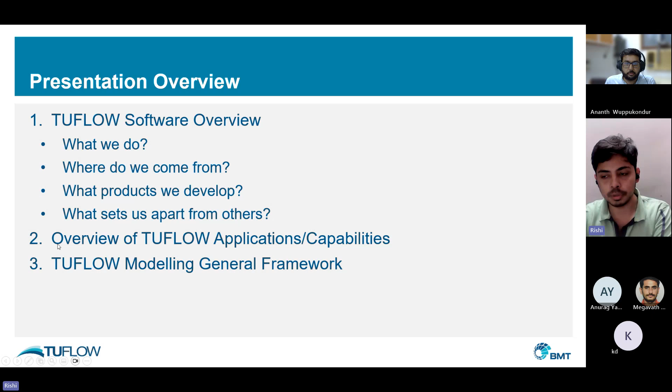So what is TUFLOW? TUFLOW is something that develops, markets, and sells state-of-the-art 1D, 2D, and 3D numerical engines, and its supporting tools, for simulating free surface water flow. TUFLOW is used by over 700 companies globally.

This image is a pretty old one, about 6 to 7 years back. At that time there were only two universities, shown in pink, who used TUFLOW for research - only IIT Delhi and IIT Chennai, back in 2017. But currently, most of the major IITs have started to use TUFLOW along with some NITs, and central government organizations have started using TUFLOW for small scale flood studies up to very large scale river studies like the Krishna and Ganga rivers.

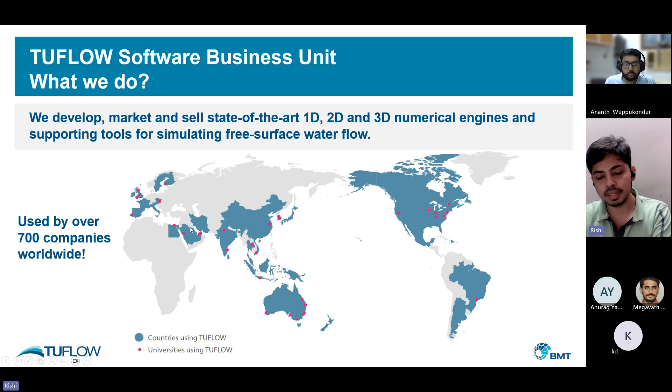It originated from Australia, from Brisbane, at a company called BMT Consultants, and then it moved to a lot of companies in UK and US, and across the globe, with other countries primarily using it for flood studies.

I won't go into much detail about TUFLOW's heritage, but one thing I can say is it's a very old software, started back in 1972 when TUFLOW was introduced as a 1D solver called ESTRY. ESTRY is the 1D component of TUFLOW. The name came because it was initially used for modeling estuarine environments, but the name has stuck from then, and even today the 1D component of TUFLOW is called ESTRY.

This is when, in 1989 to 1990, the 2D solver of TUFLOW was developed, and from 1990 onwards the 2D solver was very prominently used across Australia. It's a very capable 2D solver with a huge number of flexibilities, and many companies who use TUFLOW for 2D have solvers within graphic interfaces that use TUFLOW's 2D engine.

2001 was the first time TUFLOW's sale was done commercially. Initially, TUFLOW was not created for commercial sale purposes - it was generally to support the internal business for BMT Consultants. But when people saw us using TUFLOW, the first request came from the UK office, and that is when the first commercial sale of TUFLOW was done.

Between 2002 and 2006, with the flexibility of TUFLOW, a variety of third-party graphic interface providers used TUFLOW's engine built into their own products with their own interface names. For example, SMS has TUFLOW as one of its components. Flood Modeller also has TUFLOW integrated. XP Solutions' XP SWMM, which historically was independent but is now part of Autodesk, used TUFLOW as its 2D engine, and this is more popular in Australia.

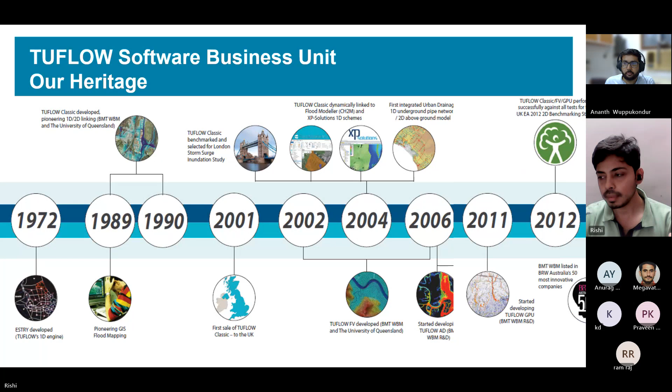In 2016, TUFLOW also got FEMA approval. In 2012, TUFLOW was benchmarked against various environmental agencies, including tests from the UK, to benchmark its speed and accuracy. This was one of the major milestones in establishing TUFLOW as the best in terms of speed and accurate solving.

The first probabilistic Monte Carlo assessment framework was done with TUFLOW in 2015, for a Brisbane flood study which won a lot of awards at that time.

In 2017, TUFLOW's HPC solver, or the GPU component, was first released. This enabled all the new developments in flow modeling, such as large-scale flood modeling applications, which was only possible because of this GPU integration. Before this, models were much smaller scale and more constrained. But now with GPU solvers, it's much more reliable, and real-time scale modeling became possible.

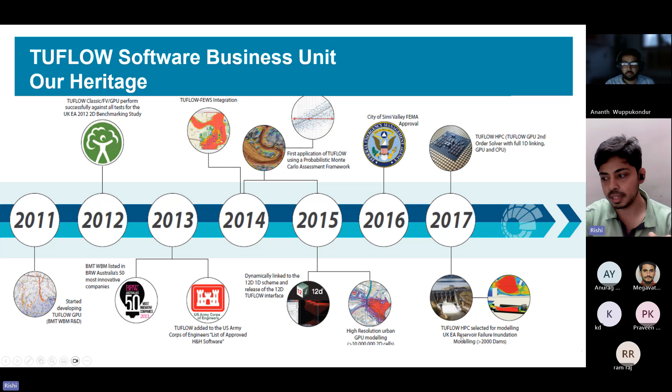TUFLOW is very well known for dam breach inundation modeling. I was part of a large-scale project in the UK when I was working with a major consulting group, where we modeled all 2,000 major reservoirs of the UK using TUFLOW. TUFLOW was specifically selected for its speed and accurate solver mechanism. This TUFLOW HPC scheme was selected for modeling UK reservoirs for breach inundation modeling, and this was the dam breach inundation model I worked with.

What are the benefits of having TUFLOW knowledge in the Indian scenario? Apart from having a very good, robust solver that's quick and flexible in model setup, there are many MNC companies that use TUFLOW in India. For myself, after my master's from IIT Guwahati, I was looking to get into one of these companies to start my water modeling career, and that's when I joined Mott MacDonald as my first company.

There's currently huge demand for TUFLOW modelers with some mid-level experience. Companies are hiring for various projects in the UK, Australia, US, and Europe, so there's a big requirement for TUFLOW modelers. For students and researchers too, having common working knowledge of TUFLOW gives you multiple opportunities, making it easier to work abroad or collaborate with clients and researchers.

I'll show you why TUFLOW is special in terms of flexibility of model build. There are three primary products. One is ESTRY, a 1D open channel flow for pipe networks, which also supports 1D structures like bridges and culverts. Then there's TUFLOW Classic or HPC, the fixed grid-based solver using square cells, which has two components: GPU hardware and advection dispersion.

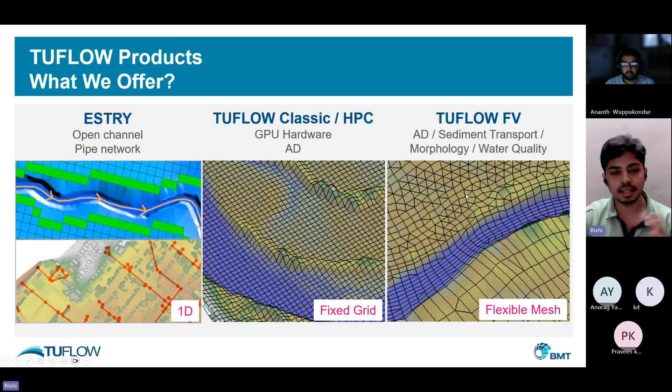One thing to note is that if you take TUFLOW Classic or HPC, ESTRY comes for free—it's already built in and not sold separately. So essentially there are two solvers: TUFLOW Classic or HPC, and TUFLOW FV, which is for coastal and sediment transport modeling. These are the three products we have.

So what sets TUFLOW apart from others? One thing is that the entire TUFLOW team are themselves users and developers of the software.

In the TUFLOW team, it's not like the developers of the software are some computer programmers and the users are from the water resource background. They're one of the kind of company where all the developers are also the users of the software because they use it for the consulting business. So we really know what are the requirements as a user or the consulting works which we do.

And also from the researchers' point of view, we collaborate with a lot of universities to know what are the users' requirements and what new research is being done, and try to develop it within our team. So that is one good aspect. And we are open to any new ideas.

And if you want to really integrate TUFLOW into some of your codes and other things, we are happy to do that with certain libraries as well. And also we listen to our clients and build features which they want. If you see TUFLOW releases, almost every year there's a new release, and these are features which some of our clients have suggested. So those features are being incorporated apart from our own research which we do in the team.

And TUFLOW has been extensively benchmarked for the last 45 years in various university studies, internal studies, and industry assessments. So these are some of the reports which was done using TUFLOW, which was basically benchmarking against various studies. You can go through these reports on the TUFLOW website.

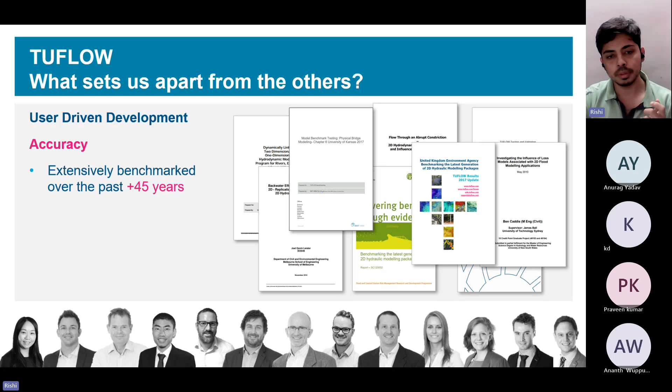And TUFLOW was also done for real world calibration studies. There are virtually many of them, thousands of them. So these are again done using TUFLOW's scheme, and these reports are available on the TUFLOW publication page. So you can go through these reports.

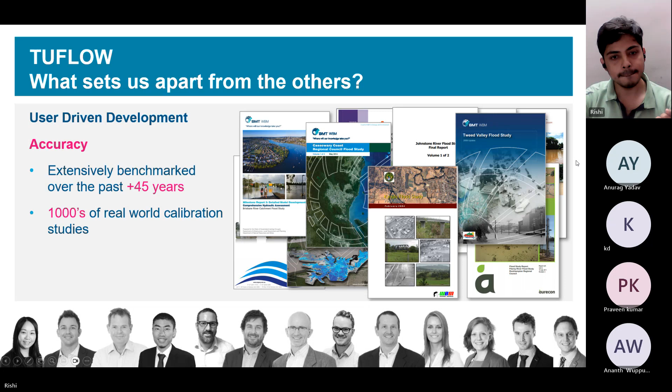So one specific area where TUFLOW really excels, apart from any free source software or much better commercial software, is in terms of speed. Put simply, TUFLOW is the fastest 2D shallow water solver available currently in the market. And again, this is not just out of the air.

This was one of the studies done by the UK's Environment Agency. So this is a report where they have tried to benchmark all the latest generation 2D hydraulic modeling packages for its speed, accuracy, and how flexible it is to get the model set up. I'm just showing one of the test cases called test 7, which is somewhat similar to a real world case. So in this, they have really benchmarked

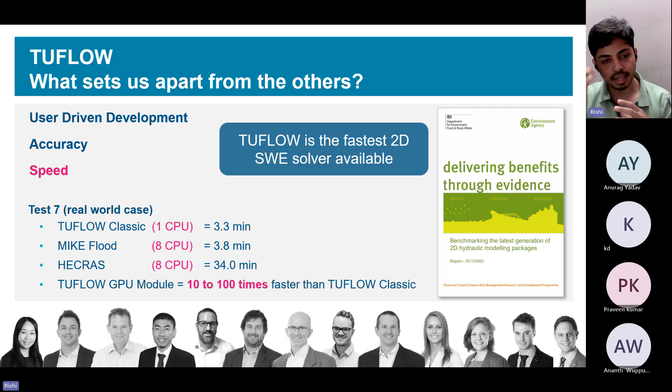an example model with TUFLOW Classic with one CPU. It takes 3.3 minutes, whereas Mike Flood with 8 CPUs takes 3.8 minutes. And HEC-RAS is way slower because of its scheme and its setup. Even with 8 CPUs, if you're running with multi-core, it takes 34 minutes, so it's way much slower. And now with the recent release of the TUFLOW GPU module, it is 10 to 100 times faster than TUFLOW Classic. So you can see that TUFLOW is fast, quite quick in terms of its solution scheme, and it's more efficient. If you see in the actual code how it works, it's very fast and it's easier to set up the TUFLOW model too.

And also, it is exceptionally stable. This is again a tsunami assessment. You can see there are huge water level gradients across a 2D model. So if your solver can predict such huge water level gradients, about 7 meters high of water in a very good environment condition, that is exceptionally stable in 2D. And also, it is very popular for 1D 2D linking schemes.

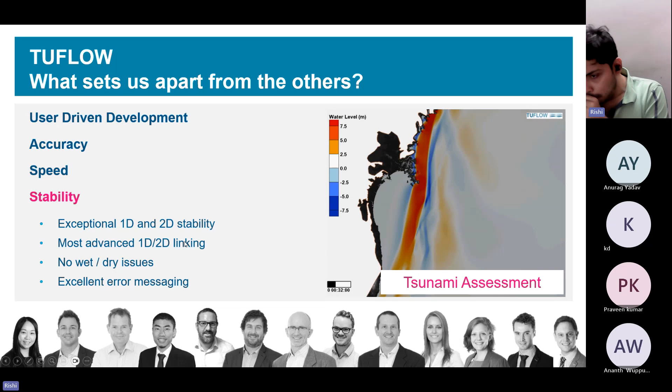TUFLOW is widely popular for 1D 2D linking in flood modeling because the 1D 2D linking is very useful. If you have a surveyed cross section of the channel, you can link it to a 2D area, which is more realistic than just taking the channel from the LiDAR or DTM.

This 1D 2D linking plays a big role in TUFLOW and it's very stable. You don't have any wetting and drying issues at all in your model. Most other software solvers I've experienced, like HEC-RAS or even MIKE, have a lot of wetting and drying issues. If a channel or a cell gets dry, the model can go unstable. But in TUFLOW, even if a cell or channel goes dry, it doesn't matter to the model. It runs the model in a very efficient manner.

There is excellent error messaging capability. TUFLOW is very much linked with GIS, QGIS shapefiles, or even geopackage files. If there's any error, warning, or check file, it gives you a proper check file which you can load in QGIS to see what the issue is. There's also an error code, and with that code you can go to TUFLOW's website to see the possible resolution and do an interactive check yourself. So it's not very much of a black box. The code itself isn't very open, but there are quite good diagnostic checks in TUFLOW which really help modelers move away from that black box kind of mentality.

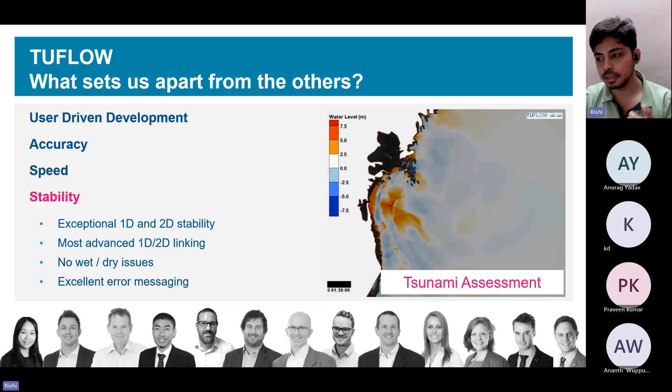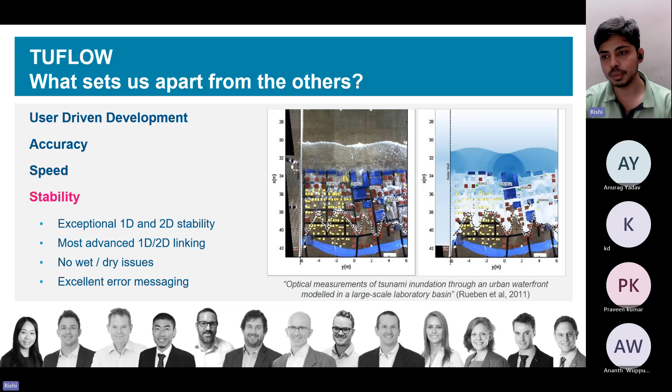This is the extent of tsunami inundation done for a lab flow experiment, where we tried to study the flood extent due to a tsunami. This is the flood extent in a coastal town, and this is the model extent. The black dot shows the observed extent, and it matches very well with the modeled extent, so we can say it is quite well validated.

What I also really like about TUFLOW is the model build flexibility. Currently most people use QGIS because it's a free source environment. Though TUFLOW doesn't have a specific graphic interface, there's a plugin within QGIS you can use as a graphic interface, apart from getting the benefit of QGIS's powerful GIS functionality. So you're getting two things at once.

There's also MapInfo or ArcGIS if you want to use that environment instead. You can build in any of these layers, and you don't have to have a license to build your model layers. Unlike some software where you need a graphic interface license, you don't need any license for this - you can build your model layers freely. Only when you need to run your model do you need a license.

You can also share your results with anyone - you don't need a license to read the results either. It's all free source outputs like NetCDF, XMDF, and ASCII files, rasters, or even CSV files. It's a very simple input and output format, which is the crux of TUFLOW modeling.

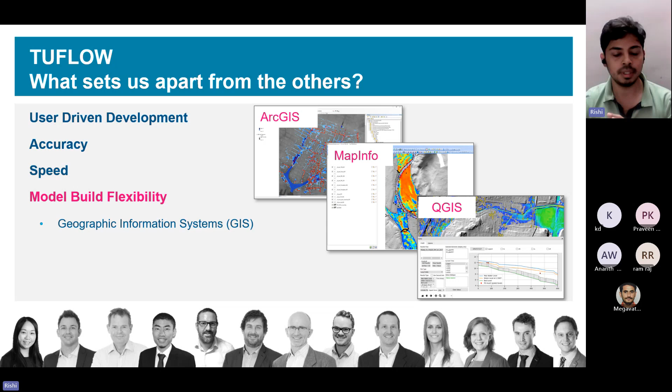As I said initially, there are a variety of third-party graphic interface providers. Flood Modeler has one component for 2D in TUFLOW. 12d is a popular Australian software for drainage models and drainage design. XPSWMM and SMS Aquaveo have the 2D engine built within them for TUFLOW, so you can use those if you want. This is the flexibility of TUFLOW - it's widely simple and easy to integrate with other third-party solvers because of its open-ended nature.

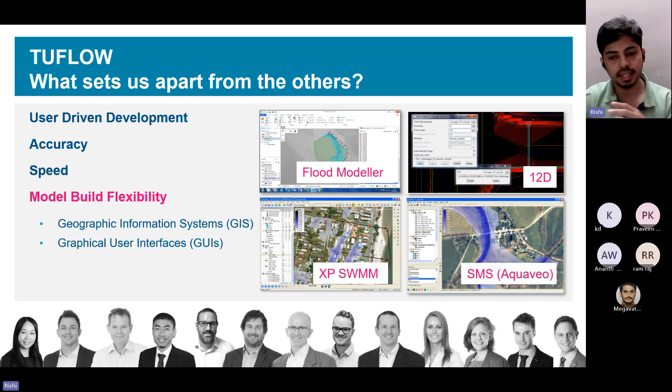There are also a variety of third-party apps. The TUFLOW QGIS plugin is one where the BMT team or TUFLOW developers have built this plugin, so you can use it as a graphic interface itself within QGIS. It has all the features to view the layers and other things. There's also something like Batchy, WaterRIDE, TRIM, and the TUFLOW FEWS adapter, which you can use.

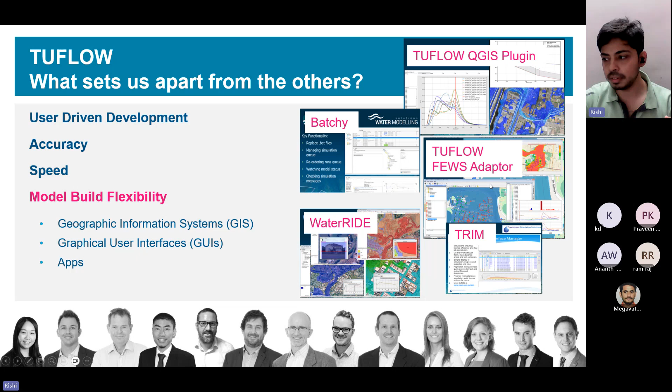TUFLOW also has an excellent support mechanism. If you're having any queries or need support in terms of training, especially in India now since I'm there, I'm training almost every 1 or 2 weeks at one of the institutes or even companies. So if you have any question or need support in your model development, it's a very good thing in TUFLOW support. If not me, even the Australian team, if you email them, they'll be very happy to help you resolve your issue with TUFLOW.

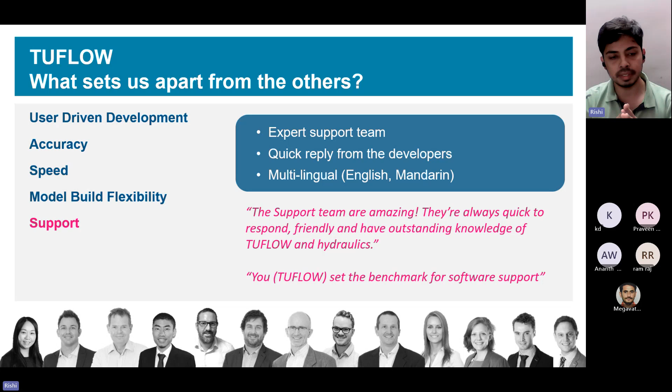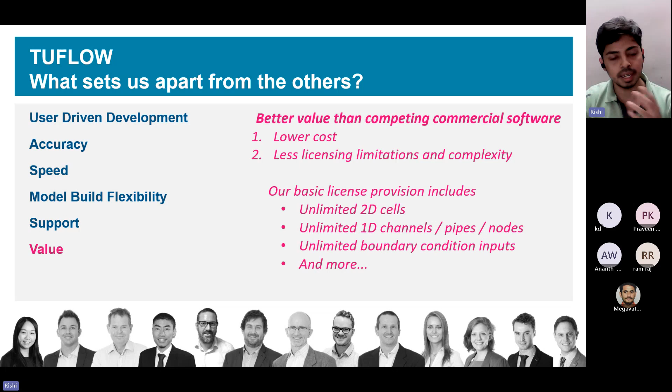Also, the one good thing with TUFLOW is that it's not a free software, but still it is much lower cost, even a fraction of any other commercial competing software. And there's no licensing limitations at all in the model. The number of cells are unlimited 2D cells. You can have unlimited 1D channels, pipes, and nodes, and unlimited boundary condition inputs can also be given. So the value you're getting for the cost paid is really good in TUFLOW.

I'll just show you some of the modeling applications of TUFLOW which I was using earlier. You can see this is the 2D only model where these are the 4 locations in this site. We are comparing the 2D flood model result with the recorded level. The blue dot is the recorded level and the red line is the model result. Across these four graphs, you can see it is matching very well. This is what TUFLOW is really capable of, representing real world hydraulics at a high level of accuracy mathematically. Obviously you need your inputs correct here, like the DTM and the flood hydrograph and other areas, but you're getting a really nice calibration with the observed data.

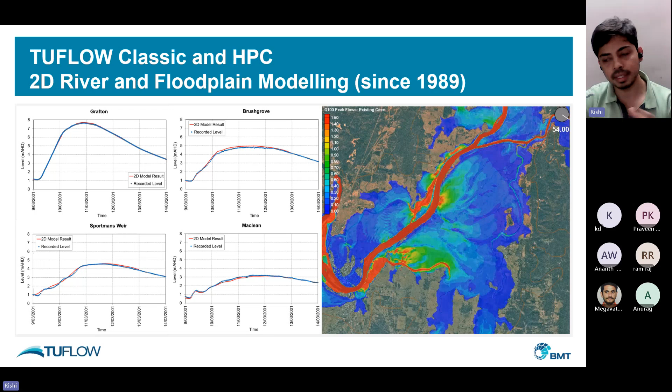Across history, TUFLOW is very popular for 1D, 2D models. This is a 1D, 2D model where you can see the 1D river flow path, and you can see how it goes into 2D, and then within very few instants, it comes back into the 1D channel. This kind of flexibility in the very robust 1D, 2D linking scheme is very popular for TUFLOW. This is a very old animation, but it really represents how the 1D, 2D mechanism works. There's out of bank flows, and after a certain distance, it comes back into the river channel.

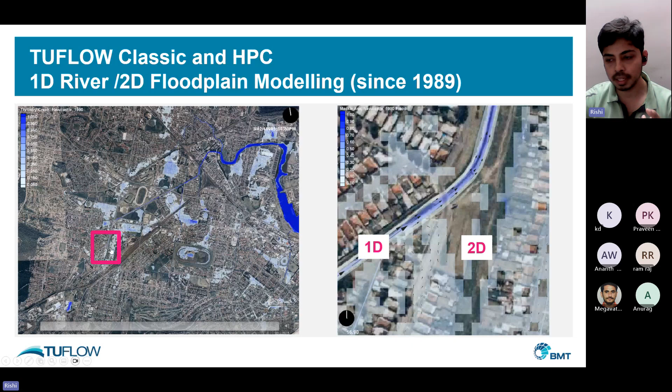So this is a zoomed in image of this area, which we have shown. This is a very large catchment in Newcastle, near to Sydney. Here we are applying catchment based flows. It is divided into multiple sub catchments, and we are modeling one of the rivers here, or the creek, what we are seeing here.

The other thing with TUFLOW is it has an integrated catchment modeling scheme too, where we can model the underground stormwater network. What you see in transparent red color is the stormwater network, and we can couple it with the overland flows dynamically. Here, every single cell is applied a rainfall. This is a rainfall runoff model, so we're not having any hydrology flows.

We're applying a rainfall directly of total rainfall of 486 mm, and the infiltration is 2 mm per hour, which we are applying here. Now we are trying to route the flows in the stormwater network as well as in the overland area. You don't see every single cell as wet because we have applied a depth cutoff of 0.15 meters, or 150 mm. So only beyond that are we seeing the cells as wet, because we don't want to see every shallow water area as wet.

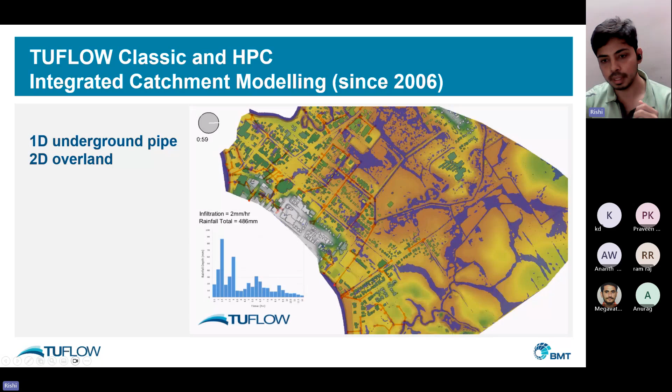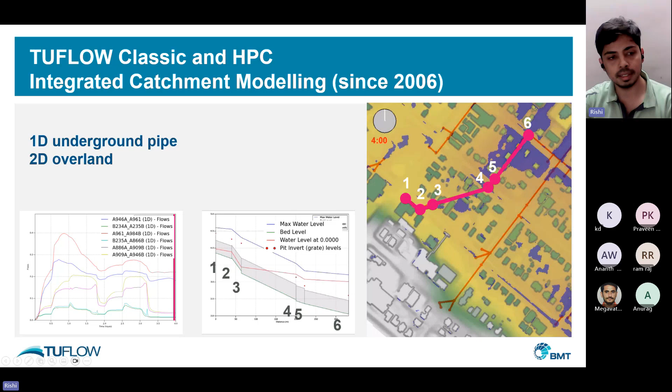So here with the advent of TUFLOW GPU, developed from 2016, this is when TUFLOW developed the GPU or HPC scheme. With this, we are now able to do very large scale catchment-based flood modeling without having a hydrology model.

This model covers quite a large area, about 600 kilometers by 600 kilometers. The model we have run is about 400 million cells, run with a 30 meter resolution. This model has taken 40 hours of simulation time, and this is a fully rainfall runoff model, so every single one of these 400 million cells gets wet.

These kinds of things we were not able to do earlier, but post 2016 across the flood modeling space, it's now more common. Now we are able to do actual rainfall runoff models and represent them in a proper way.

This is all thanks to the GPU - in Silicon Valley when they invented the GPU cards, initially for gaming purposes, the graphic processing cards. Now we are trying to use that graphic processing capability to crunch the numbers, parallelizing the calculations to crunch numbers at multiple speeds.

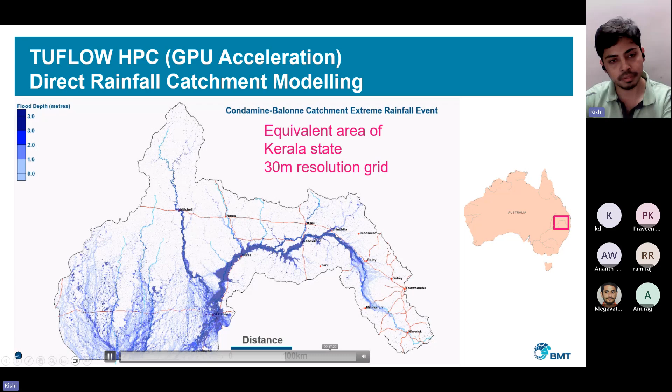With GPU we can really speed up the simulation by 10 to 100 times. These are some of the benefits, and with this comes real-time flood prediction and warnings.

So you can see this catchment where there's huge rainfall applied across it, and a huge amount of water drops in the catchment - you can see the flood inundation pattern in this catchment. This can be linked to various flood prediction systems like Delft-FEWS, Flood Intel, and other third-party flood warning systems.

I can think of two similar examples using this currently. BMT did a project with the government of Bihar, FMISC, to study flooding on the Bagmati River, to set up flood prediction and warning systems using TUFLOW and Delft-FEWS.

That's one project that comes to mind for flood early warning systems. The other is in the USA - the University of Virginia has set up a TUFLOW model in the cloud, which automatically gets rainfall data from the NOAA website, and if it crosses a certain threshold, it will initiate the TUFLOW model in the cloud and generate results.

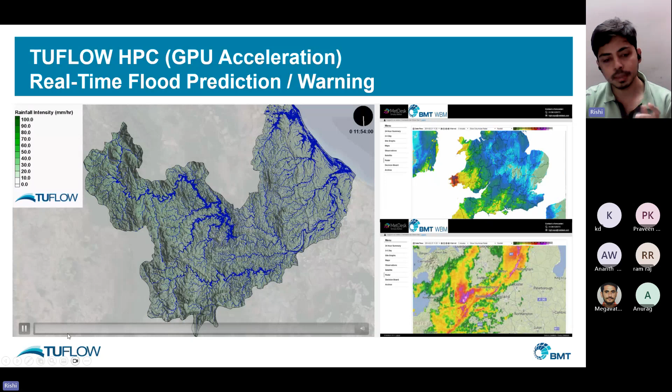Once results are generated, they are automatically transported to the state highway department or government authorities to take further action - all happening very quickly. It's an automated setup established by that university. So these are some examples of real-time flood forecasting being done.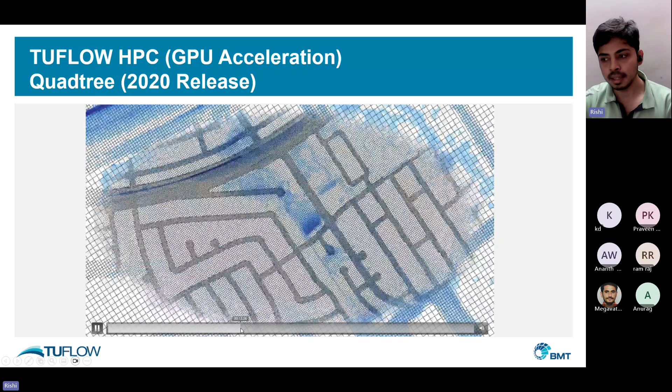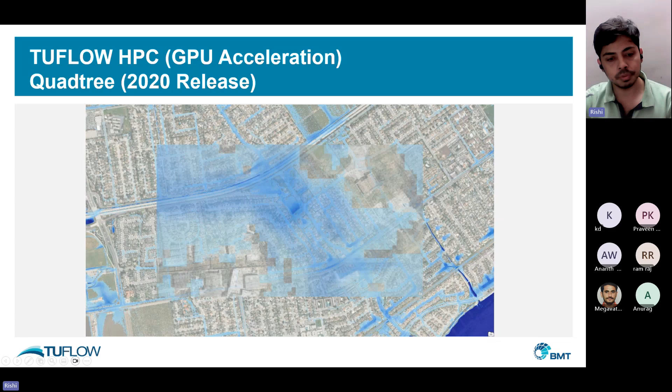TUFLOW's very new 2020 release has much better benefits, like varying cell size within a single model. Where there are pipe networks and road areas, you can use finer resolution to pick up drainage features, and outside that area use a coarser resolution. This quadtree approach is quite useful for large scale models, stormwater, and urban models.

This is the general TUFLOW traditional scheme. Most software solvers use a cell-centered scheme, but TUFLOW also has a 9-point scheme, with 9 points across a cell - the cell center represents storage of the cell, and cell faces handle transfer of momentum from one cell to the other. That's the traditional scheme of TUFLOW.

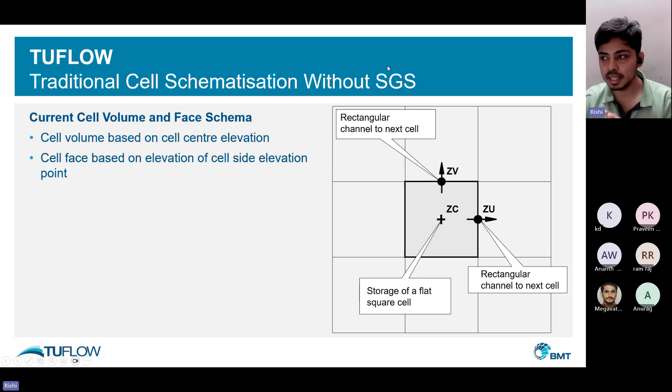There's also something called subgrid sampling. This is without subgrid sampling - the traditional approach of TUFLOW, like a flat bucket kind of thing. In this river, there's a channel and a flood plain - half the cell is within the channel and half is on the flood bank. If you take this cell, the conveyance is not well represented, so you either have to go for a finer resolution of your cells,

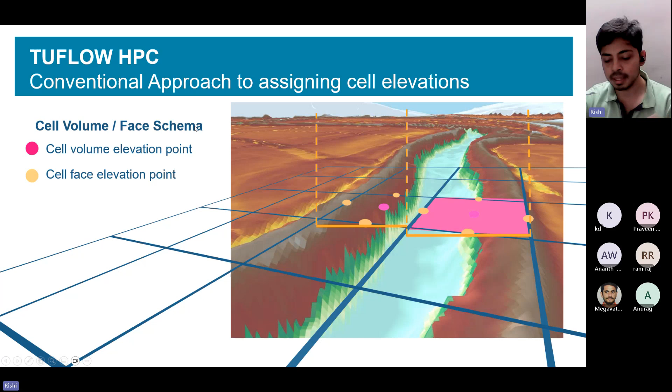or use subgrid sampling. Let me tell you what subgrid sampling is - with the 2020 release of TUFLOW, subgrid sampling lets you create this kind of curve across the cell.

So what it does is it picks up the points within a single cell and creates a cell volume versus elevation curve. Earlier it was a linear line for cell volume versus elevation, but now with this approach, cell volume versus elevation is a nonlinear curve.

And with this, you can go for a higher... Now the benefit of this is that you don't have to worry about your cell size. You can go for 30 meters or whatever bigger cell size, a coarser cell size, but still get proper accuracy in this model. So that is one of the benefits of subgrid sampling.

There are also multiple other benefits of subgrid sampling. You don't have to worry about your model orientation, grid orientation, and a lot of other things. And it's much more stable as well with this kind of subgrid sampling.

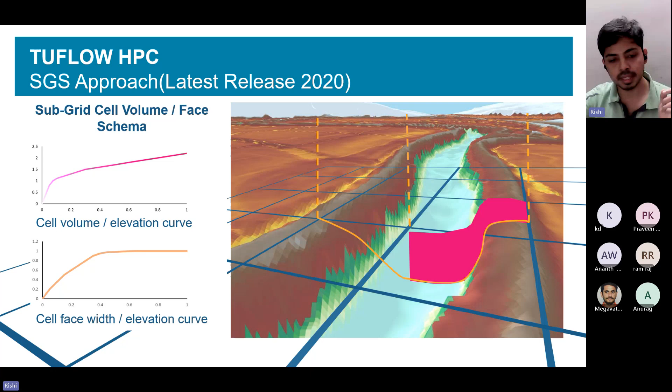Tuflow has also implemented a new scheme for turbulence called Wu 3D. It is much better. These are the different tests which were done in Tuflow by the Tuflow team, using different lab flow experiments.

So with a 90-degree bend, dam break, flume, and Brisbane River, they varied the scale of the model from very small scale to very large scale, trying to see which is the optimum case where they can achieve good parameters.

Out of all these tests, usually the Smagorinsky constant is the most commonly used one, and historical Tuflow also uses the same. But now, from 2020, Tuflow uses the Wu 3D scheme, which shows an excellent outcome.

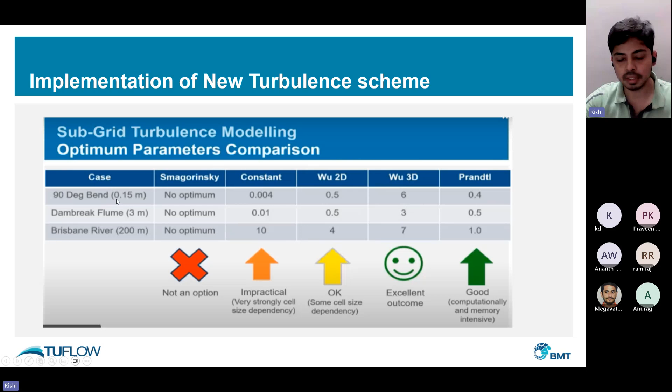This Wu 3D scheme is only used by Tuflow, not by any other commercial software. It's very good because you don't have to really change the turbulence parameter for the scale of your model. Usually if you use the Smagorinsky constant, it depends on the scale of your model, so if the scale changes, you need to change the turbulence parameter. But here it's more or less constant.

Tuflow has inbuilt capabilities for real-time flood predictions. You can have route closure locations, and you can also assign evacuation centers and evacuation routes. Based on that, it will show you the time it takes for the flood level to reach a property. So here it takes 10.5 hours, 9.9 hours to reach the property.

These are the properties, and what is the time it takes for the flood to reach a property. It's also compatible with flood early warning systems like Delft-FEWS and FloodIntel, so it is very well suited for flood early warning systems.

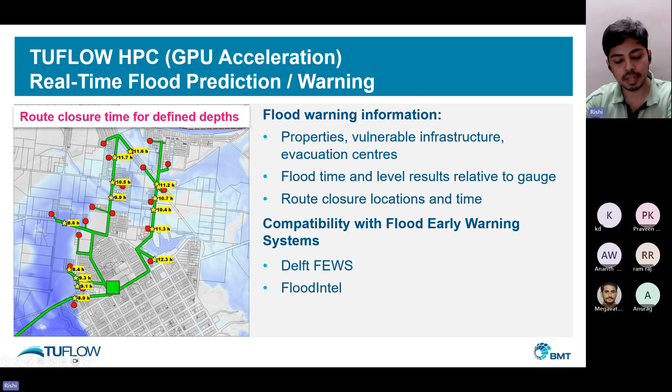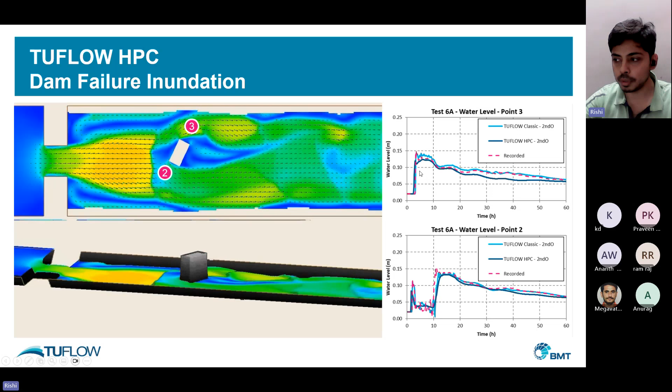You can see points 2 and 3 here, and we're trying to validate it with an observed data set, to see how the water level changes across these points, 2 and 3.

Tuflow Classic, HPC, or even Tuflow FV has an advection dispersion scheme. So if there's a pollutant which is dropped here, it routes down the channel, goes down this channel here. This is used for studying any contaminant assessments in those areas.

This is something called residence time assessment, used to study how this is much used for any flushing studies. This is a coastal lake in a coastal area, and we're trying to study how this contaminant would affect in terms of the inflows or even the tidal flooding.

This is the tidal boundary which we apply, and this is the river inflow which comes in upstream. We're trying to study how much concentration is in the coastal lake, which locations they are concentrated in, and when they would be flushed out of the system.

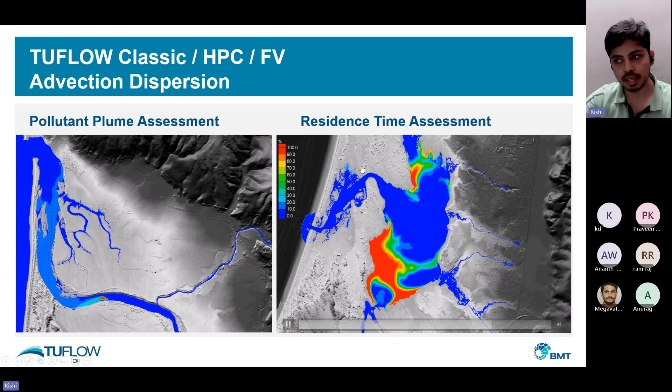So that is the residence time assessment, which you can study using TUFLOW FV or even classic HPC. And TUFLOW FV, now we are getting into the FV side of things, which is mesh-based. You can see this is a mesh-based mesh, which is an outfall, and we're trying to study the contaminant assessment with a mesh.

So you can see we have just added the contaminant on the top of the surface. And this contaminant we can study in the three-dimensional way as well as in the 2D area here. TUFLOW FV has a three-dimensional module as well, where we can study three-dimensional vectors as well as three-dimensional concentrations as shown here.

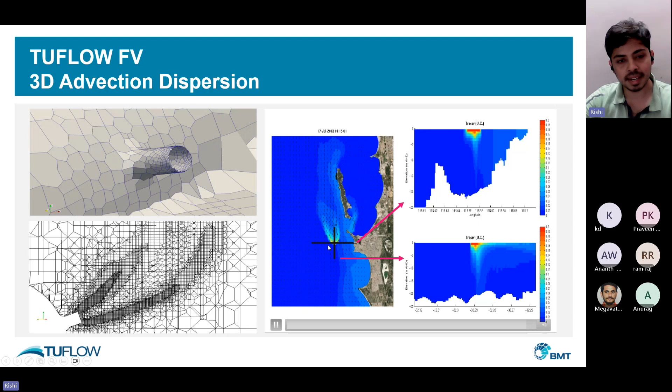And this is an outfall, a coastal outfall which we are trying to study here. So this is again managed by the currents in the ocean as well as the waves, the contaminant.

TUFLOW FV also lets you study density stratified environments, like the interaction between salt water and fresh water in coastal areas. When this wedge is created, the density stratification of the system can be studied, and how this density stratification will affect other parameters like water quality. Also, because of density changes and temperature, it will affect other processes too. So those things we can study.

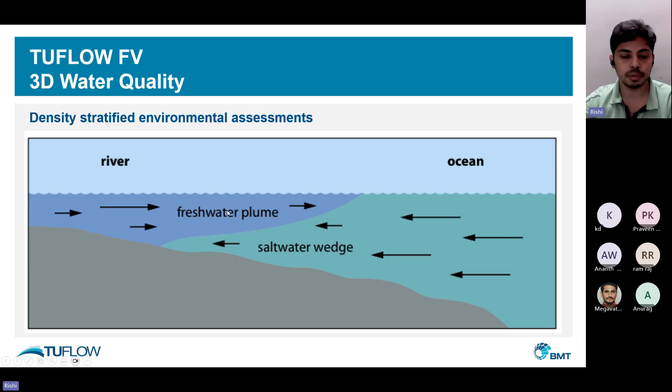This is especially useful for estuarine environments, where saltwater and freshwater interact. The same example - I think this is in Melbourne. So this is the river flowing across this city, and this is the coastal area.

So this is the estuary, and we're trying to study what is the concentration of saltwater and freshwater across this estuary. It's about 18 kilometers of estuarine environment, and we're trying to study to what extent the saltwater is being shown, in the three-dimensional way as well.

So it's not only in two-dimensional - we're trying to study in the three-dimensional way what the concentrations of saltwater are, and we're trying to match that with the observed levels or observed data. So this is the model data and the red is the observed data for salinity as well as depth.

You can see as we go deeper, the salinity increases because the salt water is more dense, so it gets settled in the bottom levels of water. So this is the wedge which forms here.

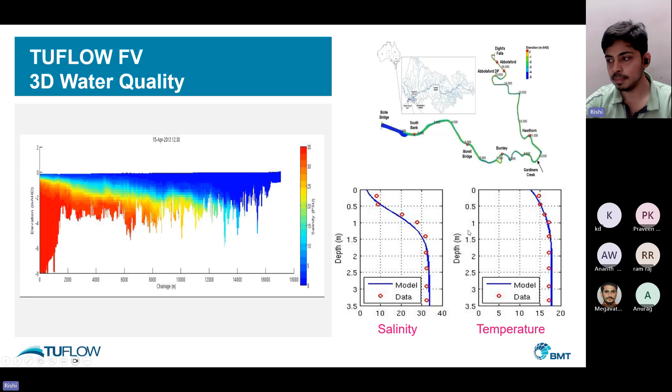So one thing is studying the temperature and salinity effects, but the other thing is how these salinity and temperature changes affect the water quality processes. So these are the water quality processes which can be studied with TUFLOW.

This water quality module is AED, which we call Aquatic Ecosystem Dynamics. This was a separate solver, a research solver developed by Matthew Hipsey at the University of Western Australia. It was quite popular and a very robust water quality module, and now TUFLOW has integrated that water quality module into TUFLOW.

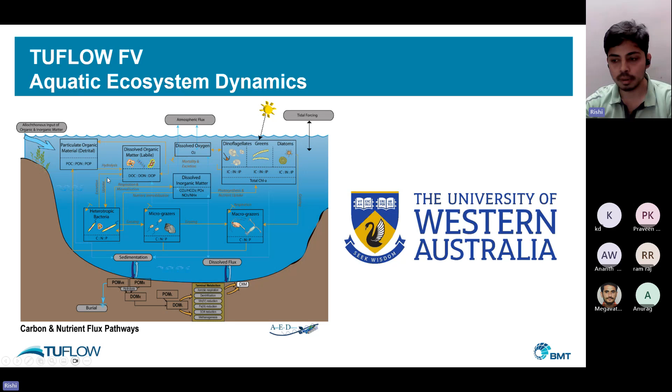Now we can run TUFLOW dynamically, with the hydrodynamics set up in TUFLOW linked with the water quality module. So all these processes for organics, inorganics, phytoplankton and zooplankton can be simulated, and how this is affected by atmospheric fluxes, tidal forcings, and temperature from the sun or solar radiation. All these things can be studied in great detail with the TUFLOW water quality module.

TUFLOW also has a sediment transport area, so we can study this coastal dredging scheme where we're trying to see the effect of sediment movement with dredging. This is the natural sediment without dredging, and this is the total sediment with dredging.

If you do it in a post-processing manner, total sediment minus natural sediment, you'll get the dredging part of sediment here. So this is TSS, total suspended solids, across.

At a certain point there was dredging which happened in this period of time, and due to that there's a rise in TSS here, and we are trying to match that with the observed data. So the red dots are observed data, blue is the model data.

TUFLOW also has a three-dimensional sediment transport feature where we can study the three-dimensional sediment deposition profile, and this is the model profile in three dimensions.

And in TUFLOW we can simulate both cohesive as well as non-cohesive sediments in the same model. Also, each of the particles can have its own mechanism of sediment deposit, like different sediment features, which can undergo changes from the forces of hydraulics.

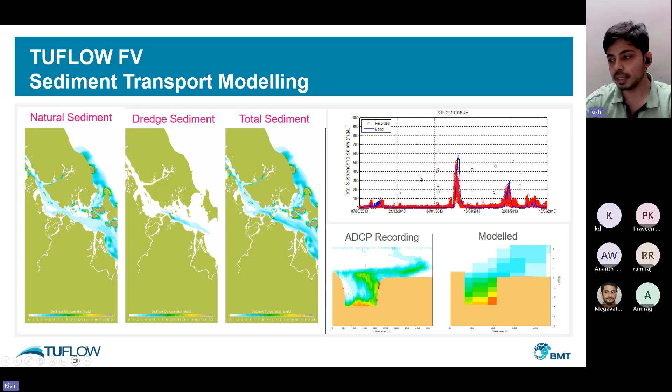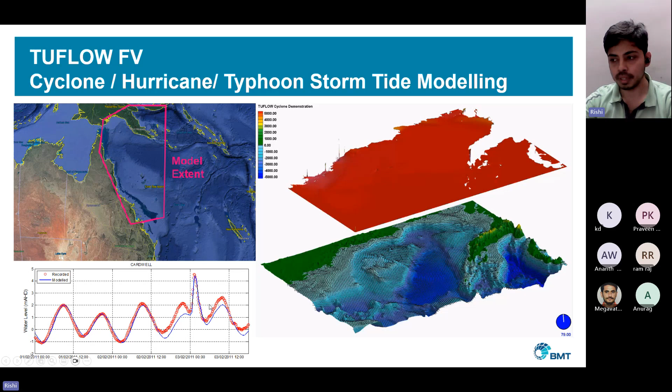So cyclone, hurricane, typhoon, storm modeling can also be done with this. We're trying to match the water levels due to a cyclone event that occurred during this period. There's an example as well which we can do freely for cyclone models. This is all with TUFLOW FV.

I think that's all from my end. I've just shown you some examples of what we can do with TUFLOW, what TUFLOW is, and what engines and modules TUFLOW has. That's all from my end till now. I'll leave it open for discussion.